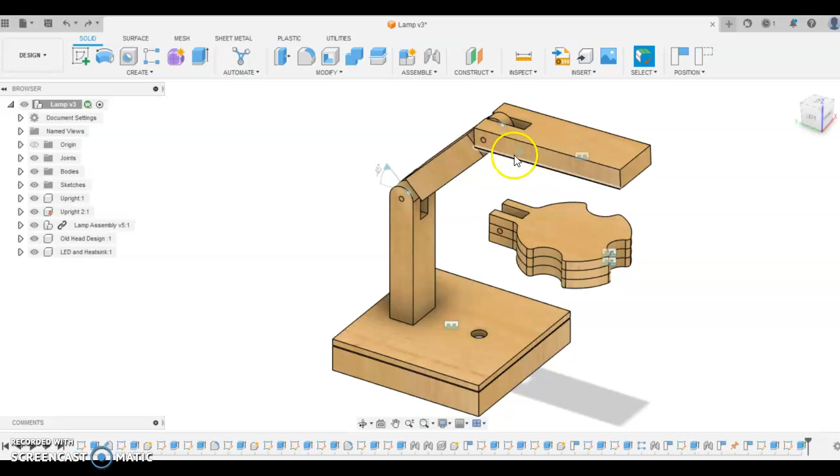Now, this is what we previously did in Year 9. We created a very basic head design.

Inside of that head needs to house the LED strip. The LED strip is quite thin, but it's actually mounted on a piece of aluminium. Your teacher will show you that in class. The aluminium is important because it takes the heat away from the electronic component.

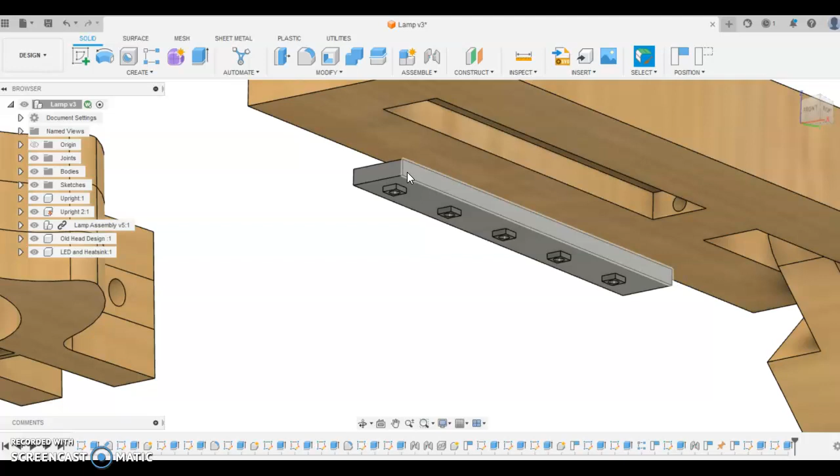Obviously, we don't want to stick it straight to the timber, because we don't want the timber to heat up and become a fire issue.

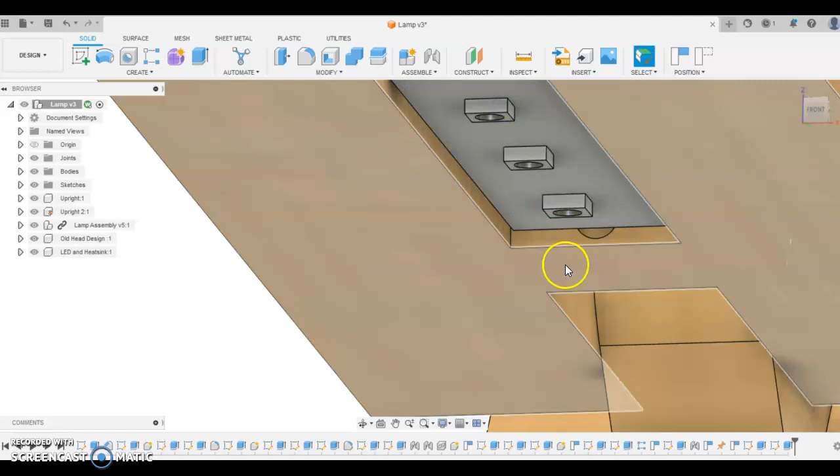The other thing we can notice about the existing head is that there's a hole to take the cord away. So once this is mounted up into the groove, which we used to manually cut, the cords would go into that hole and through, and then follow the lamp stand down and through a hole at the back. So we're still going to have to cater for that wire that goes down there.

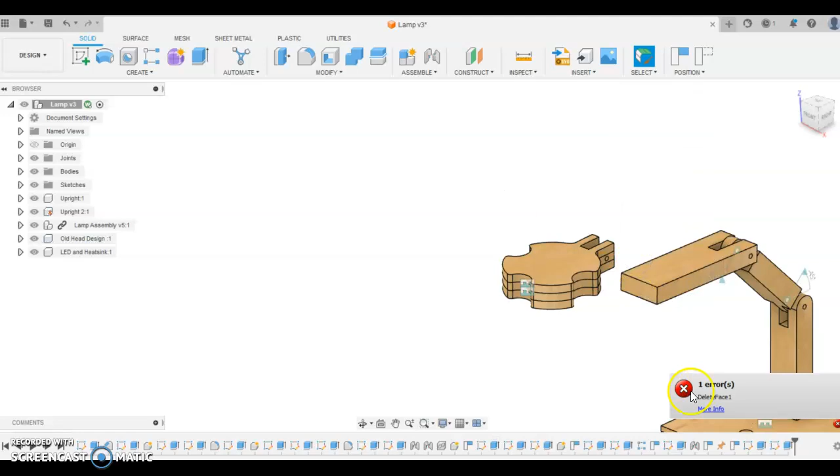So what we want to do is delete this manual component here. We won't do it that way because it doesn't work. We'll delete it here, and we want to create something more unique.

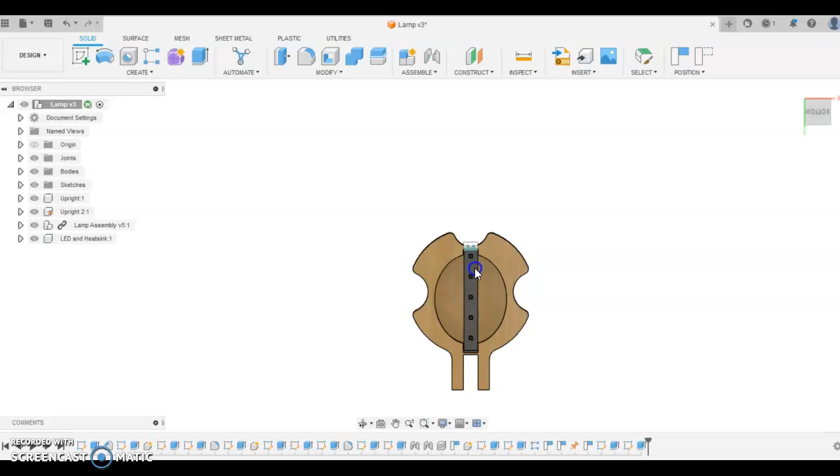Now, the good thing about the laser cutter is we can be creative without having to worry about getting our fingers near the cutting blades of the machinery. So curves are going to come out really nicely.

We can use a layering kind of technique here. We're limited to about 8 or 9 millimeters pine, so I've used 3 layers in this design.

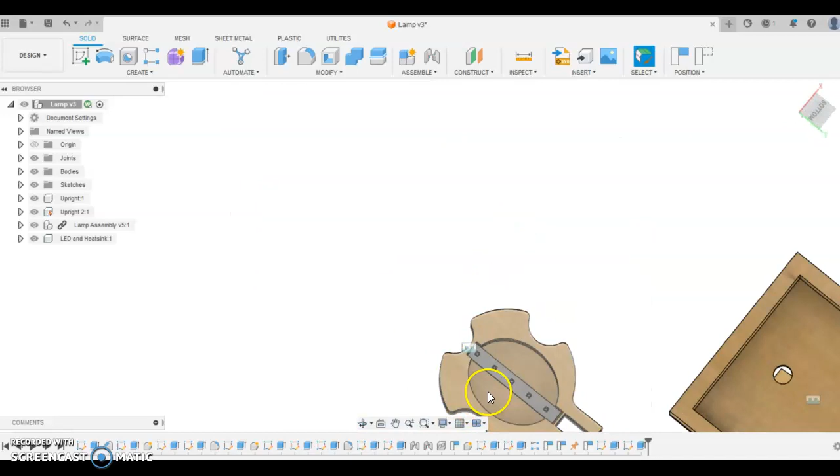You can see I just put in that LED strip, so I've created a housing for it to sit in that position. I've got a groove up the back here where the cord's going to come out, and we will have to manually drill these holes later on the drill press or a cordless drill in the workshop.

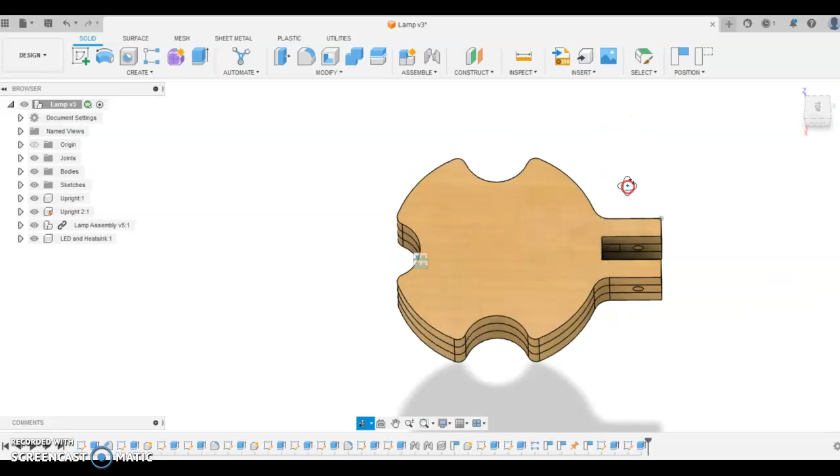We can't cut in a downwards action and then also through the flat or horizontal direction with the laser cutter. It's a top-down process, so it will only cut from the top down.

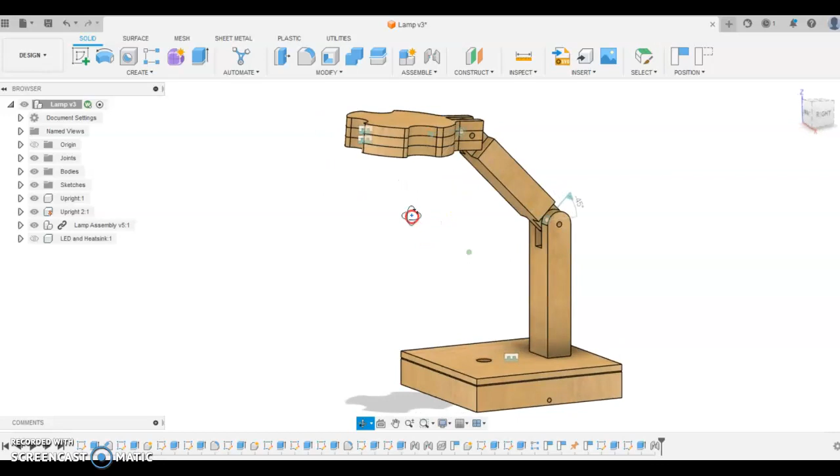So I've assembled the lamp head now onto the base. That's what it will look like. You can see the layers in the design, so I have to cut those 3 layers.

I'm going to go about now creating this, and I'll show you how I did it. Firstly, create a new design. Make sure you've saved that design.

So I've got it in a location, it's my laser cutting testing folder. I've titled it Lamp Head 3. I've only got a 3 there because it's my 3rd attempt at this.

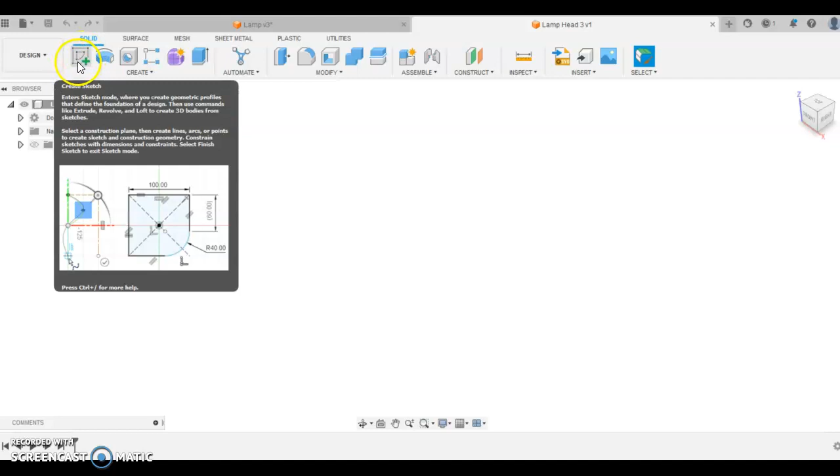And we're going to start drawing the lamp head. So I'm going to create a new sketch. I'm going to start on the top plane.

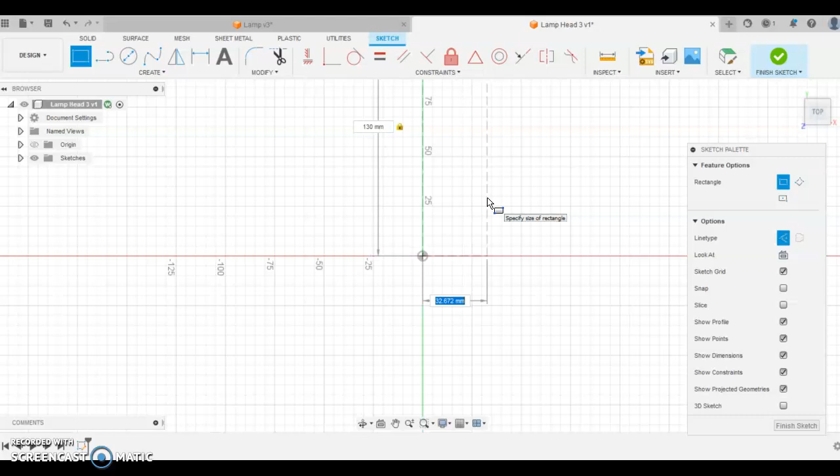And the first thing I want you to think about is it needs to fit within a certain size. So the material we're going to give you for the laser cutter is 130 millimeters high by 180 millimeters. So each profile that you create has to fit within that size, 130 by 180.

So I've deleted that sketch now, and we're going to start afresh. I'm going to create a new sketch. I'm going to select that same top profile.

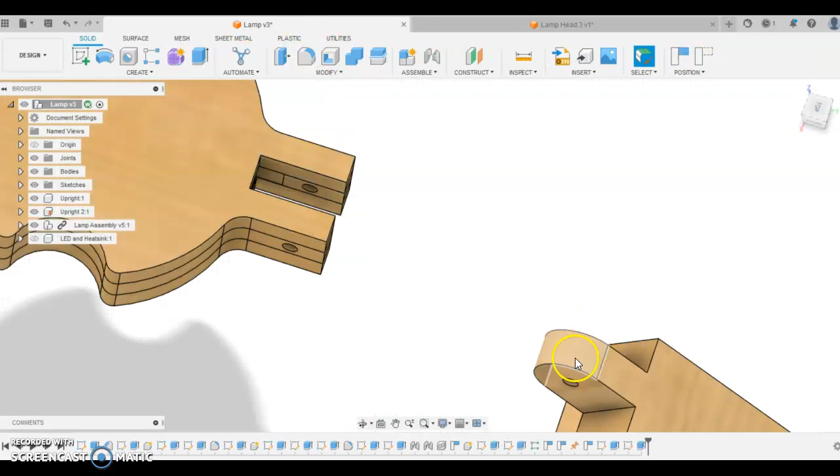And the first thing we're going to sketch is the thing that connects to the existing lamp. We've got 12 millimeters thickness here, and we're going to actually make this 11.7, because the laser cutter cuts right on the line and removes a bit of material when it cuts.

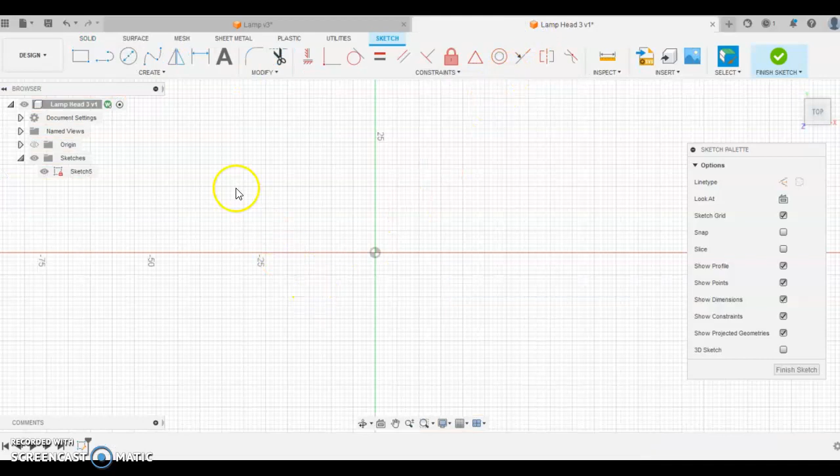11.7 is going to be the right size for this connecting part. To do this, we are going to use a center point rectangle. So down here, center point rectangle, we're going to put that 11.7 in here, and then tab, and I'm going to use 30 millimeters and enter.

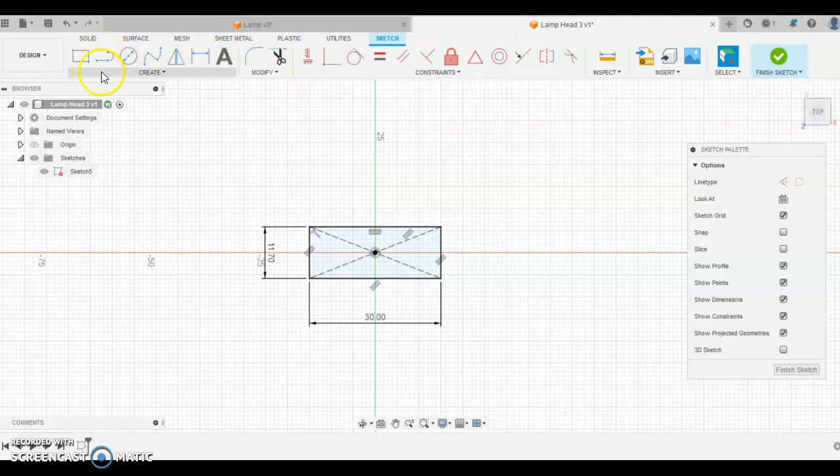Now from here, we're going to offset. So let's find, we can use center point rectangle again. So let's go back in here, and we're going to make a larger rectangle.

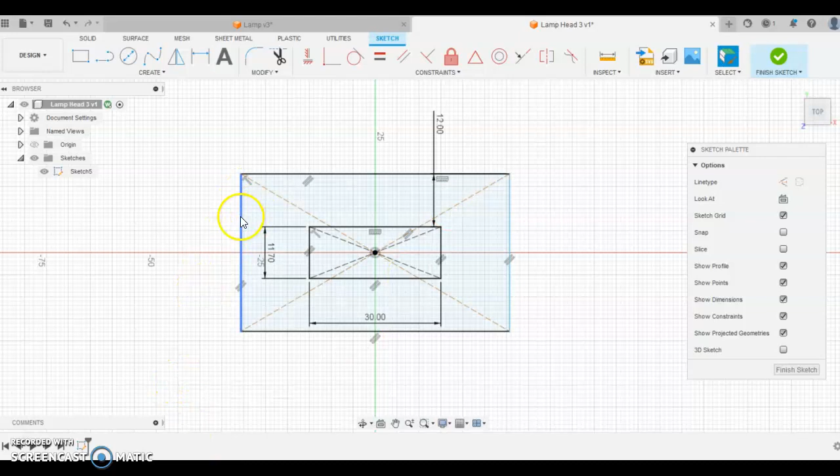So this time, I'm just going to click and I'm going to press D for dimension, and we're going to put 12 in there. Let's see what happens when we pull this way. So you can see that kind of brings both sides in.

I'm going to use a tool here which is called collinear, which is this one here. If I click that blue line and then this one, it will snap together. Now there's lots of lines going everywhere here, but essentially what I'm trying to get to is this center one's 11.7, the outside are both 12.

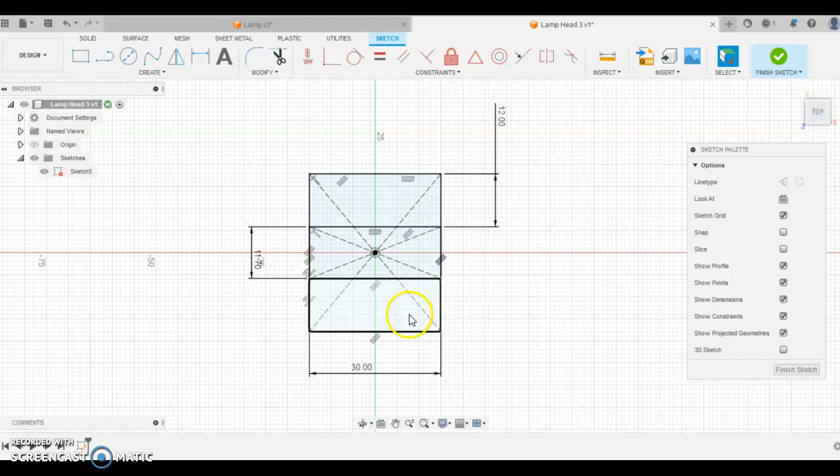Now if I go finish sketch and extrude, we only want these two pieces here. So we select the profile and bring that up to 8mm. Press enter. So now we've got that, we can create another profile.

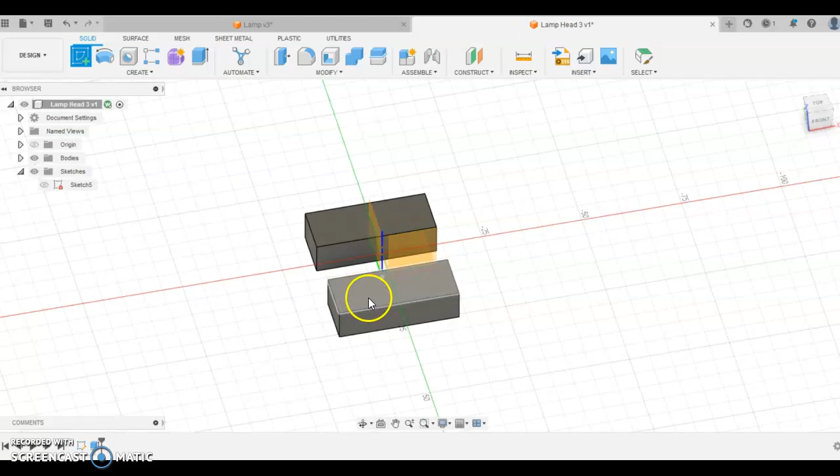So I'm going to go sketch here. I'm going to click the top component, either one's fine, and I can start drawing the lamp head.

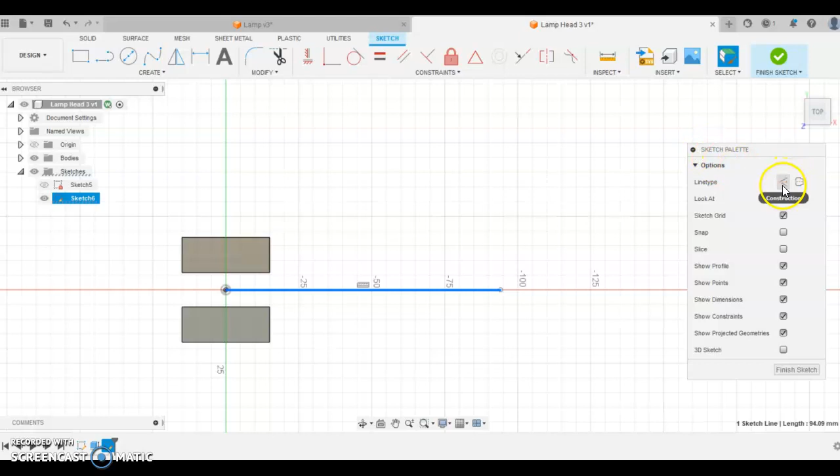So I'm going to use a construction line out in this direction here. I'm going to click that line and open up my sketch palette and click construction line. I'm just going to press escape now.

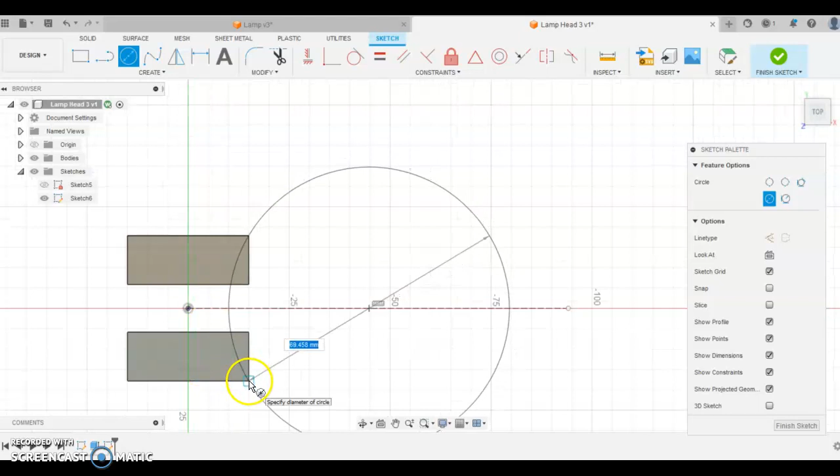And then I'm going to make my lamp head circular. So I'm going to create a circle like this and make sure it connects to one of these parts. It will be this one here. Now remember, the maximum size we're going to use for the lamp is 130.

So I'll put 130 in here.

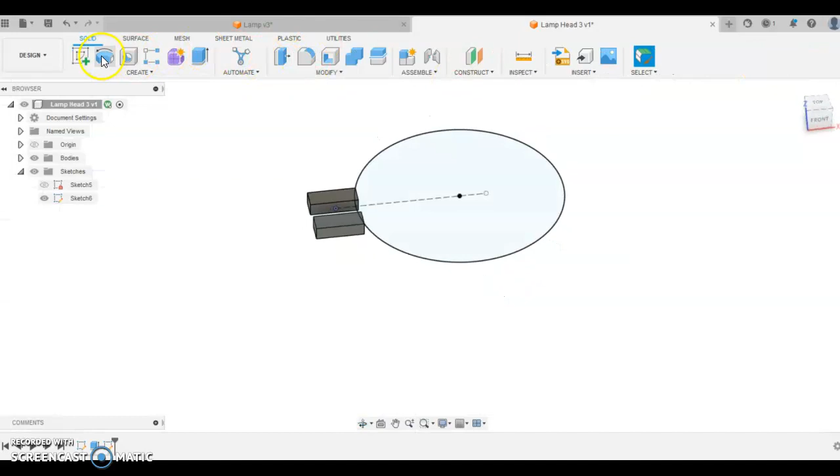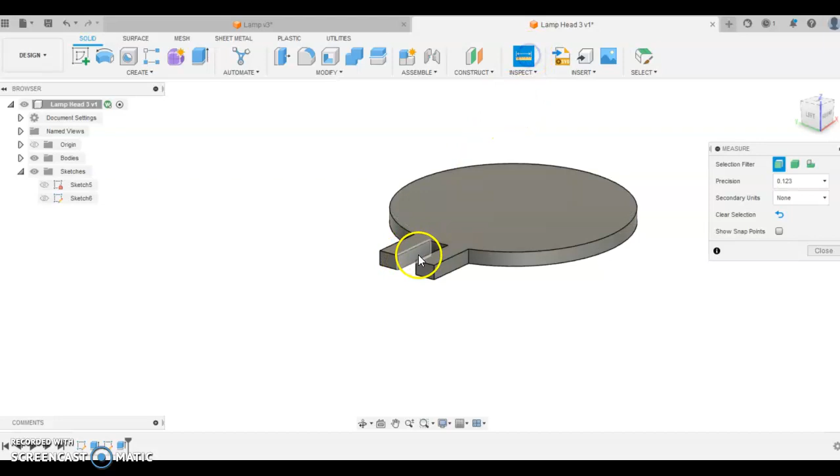And that looks good. Finish sketch, I'm going to press E for extrude. We'll select the button, and we're going to go downwards this time, -8. Make sure the operation here is join, not cut. Okay, so you can see now we're piecing this together with the 11.7 gap in between here and here.

You might want to add a detail at the front here, so I'm going to click here and create a new sketch. I'm going to use the circle tool here, and actually I'm going to do it on the side here. Like a little 35mm indent, which looks like a finger groove, I guess.

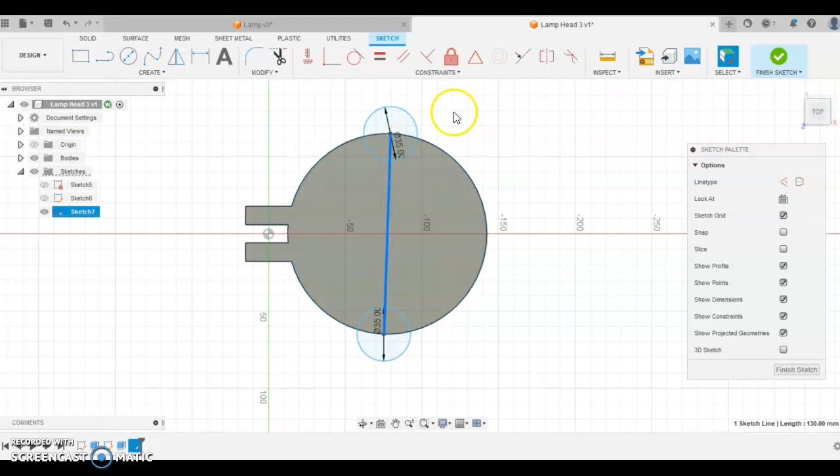Now at this point you can just be creative. There's no right or wrong with this, just what looks cool. This line here I've put connecting to the two centers, and if I use this one here, horizontal, vertical, it'll snap it kind of symmetrical on each side. And then I'm going to finish sketch, extrude away both of these sides.

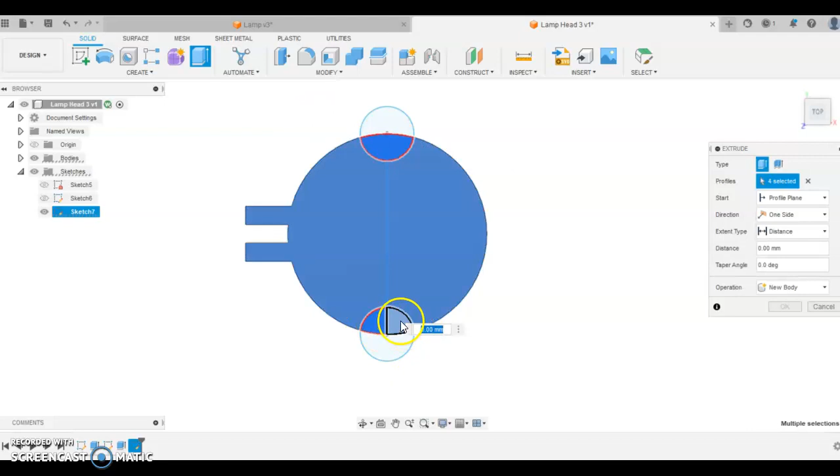I didn't want that center, so I'll try it one more time. Have to be careful about what you select, and then I'm going to cut that through. So that's basic enough for what I'm trying to demonstrate.

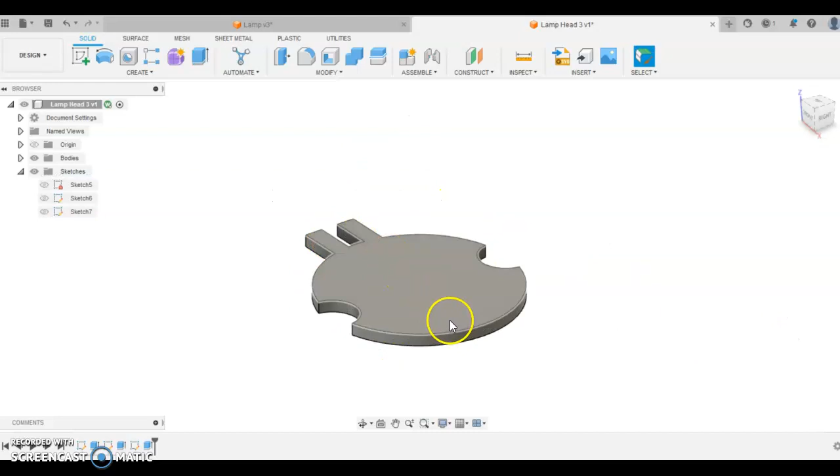So that's my first piece. What I'm going to do now is duplicate that. In this menu here, expand the bodies, and body 1, right click and go create component from bodies. So now this component here is listed as this component here.

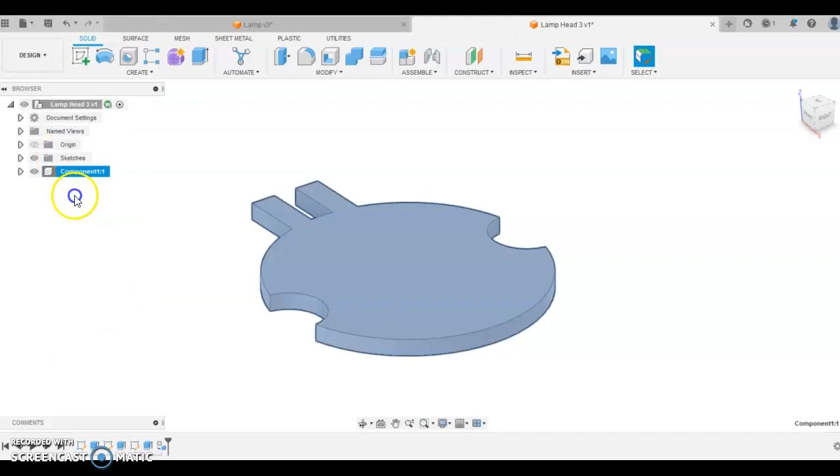I'm going to right click it and go copy, and then come up to the top, right click and go paste. But instead of paste, I'm going to go paste new. Now I'm going to pull this one downwards, and that's going to be my next layer. So if I click OK, I'll pull that one out of the way.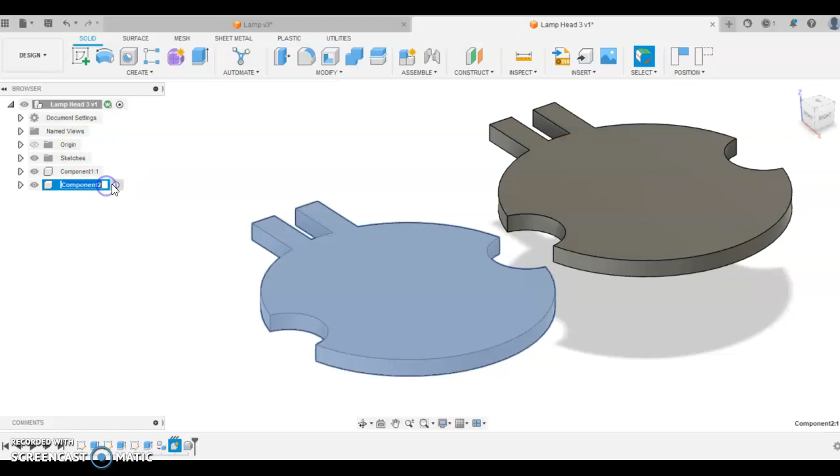I've got two exactly the same layers, and this one here is my component 2, or layer 2. I'm going to activate it, and then sketch on it. Capture position, and I can choose what I want to do to that. So I'm going to put a center line through first.

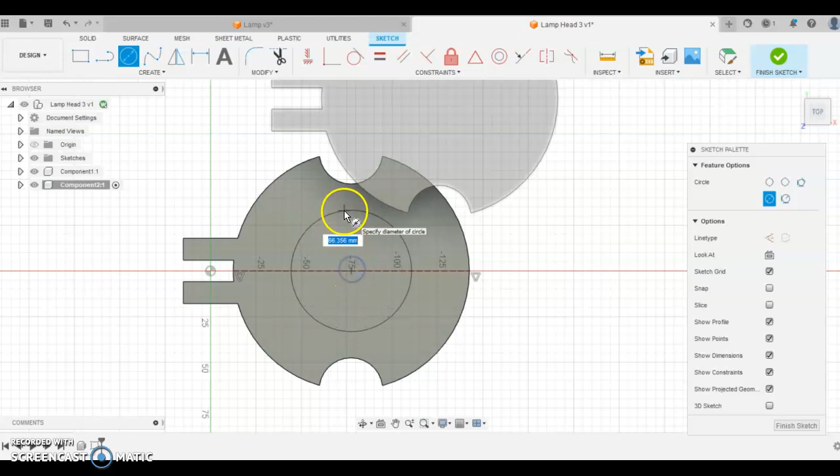I'm going to put a circle in the middle. I'll put a dimension on that. I'm going to use my center point rectangle again to remove a bit more material out of here, so 35.

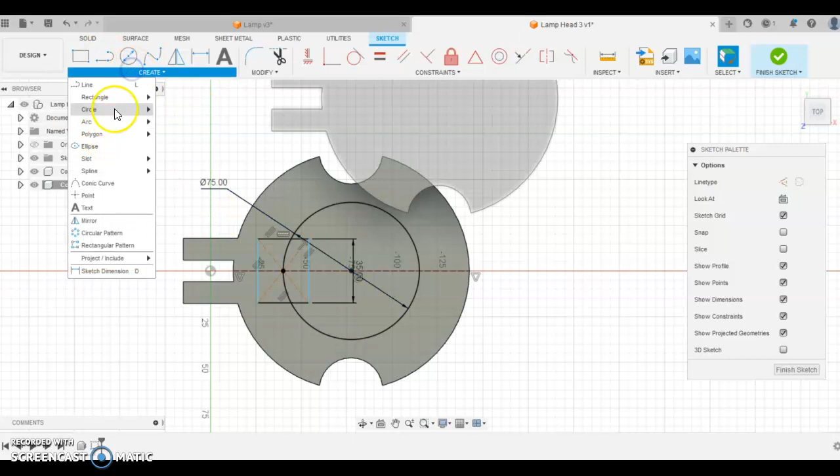Another one, center point rectangle, 35. And I might want to put a dimension from here to here, 100.

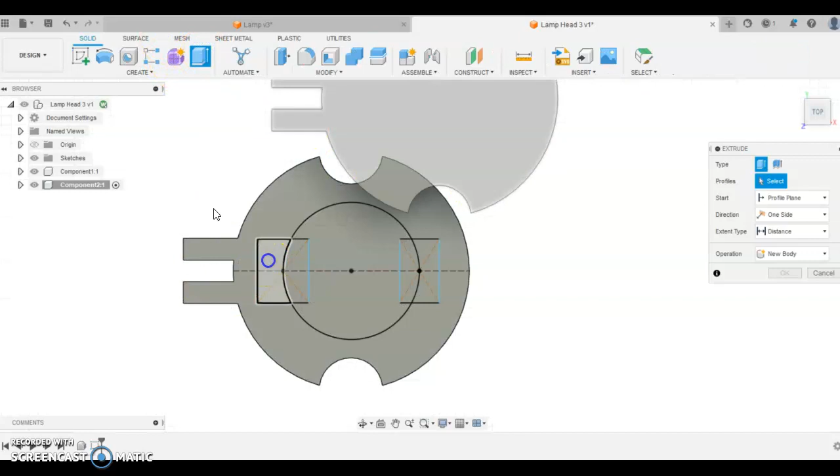So now if I finish the sketch and extrude all these components out, and extrude it the whole way through, we have got like an inside layer. I'm going to come up to the top here again and highlight this top dot, so you can see this layer will stack on top of the other layer.

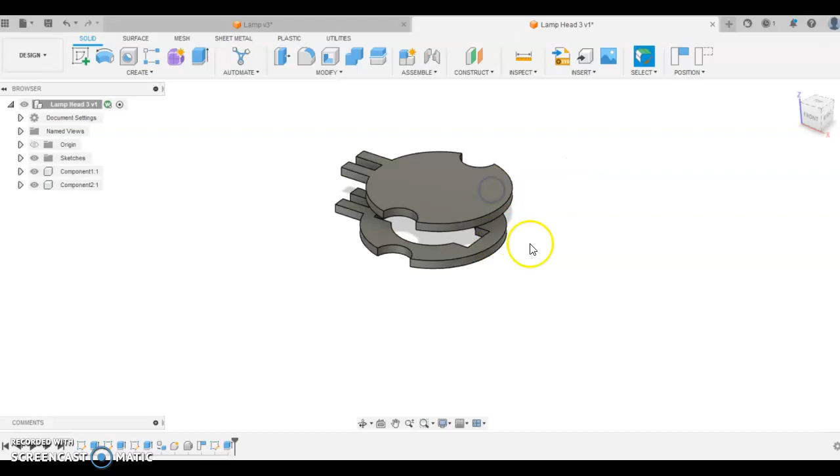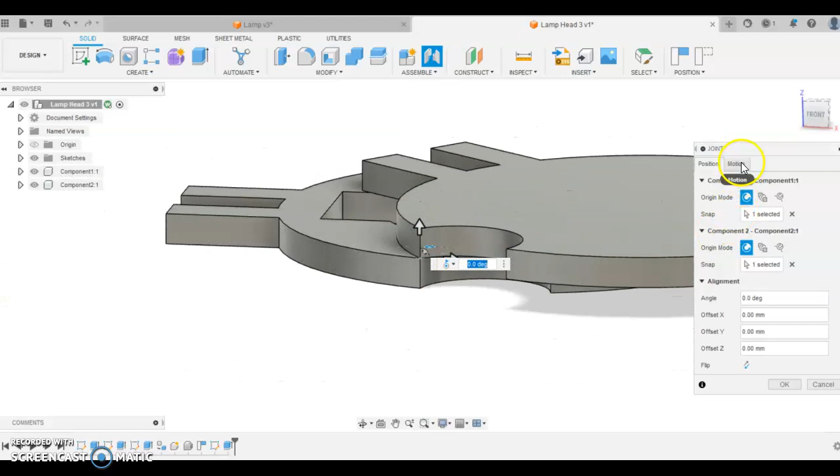If you want to do this the proper way, what we do is go into joint here, and I'll select a point that's the same on each, so this one here to this one here. I'll bring them together. This is in a rotation movement, but I'll lock it in as a rigid. So you can see my 2-layer design.

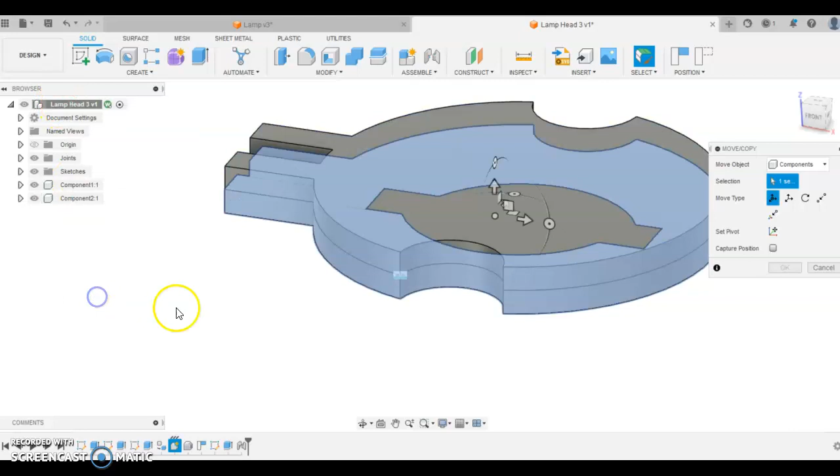The next thing I can do is come down to here, right click and go copy, and then back up to the top, right click, paste new. And I've got a third component, so layer 1, layer 2 and layer 3. I can do that joining technique again. And I've got a head design for my lamp.

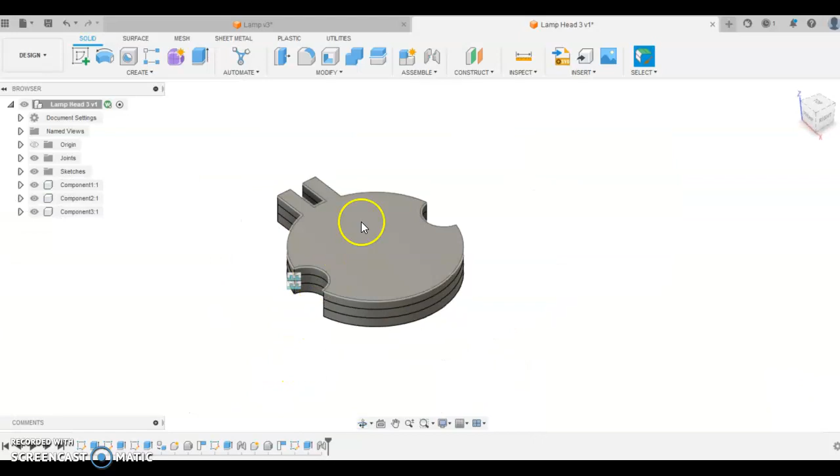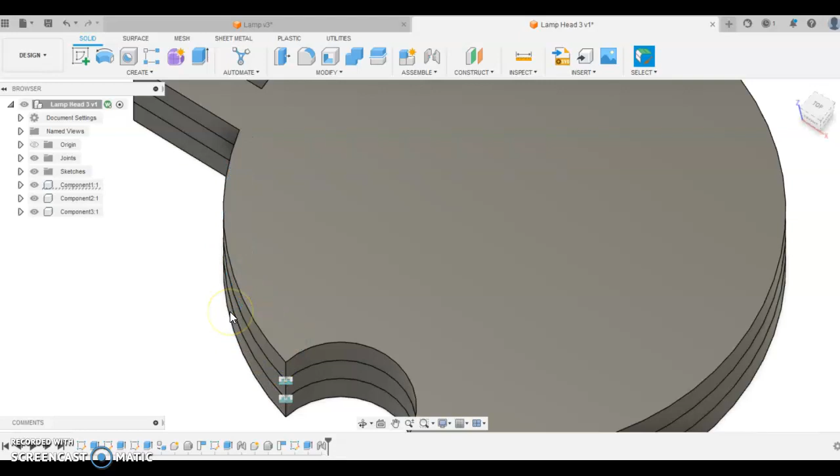So you can be a bit more creative than this. The key for creating these though is a top-down process, so you need to make sure it's only a profile. We don't want to start creating things with fillets on it, so like this here, if I put a round over edge there, the machine's going to get confused and it's going to want to cut right through with this line and right through with this line. So it's going to be quite sharp and bulky kind of edges.

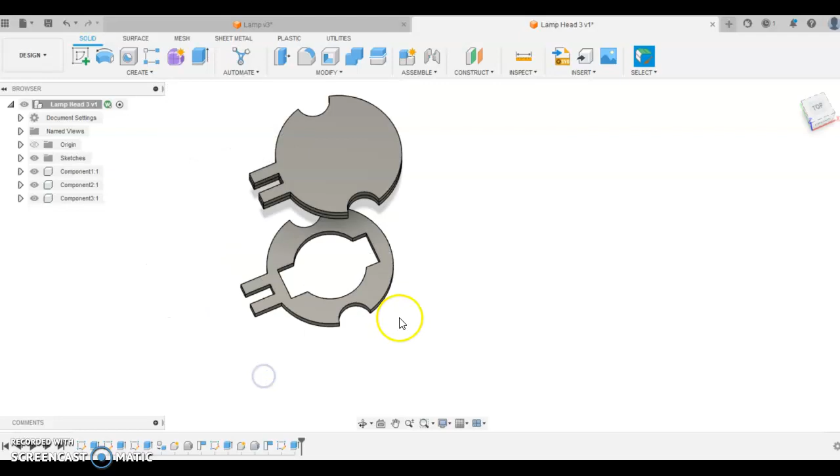We don't need to put the hole through here yet. We don't need to put the hole through here yet. Just think about layers that will be able to be cut with a laser cutter, and I'm sure your teacher will go through it a bit more in class about what's appropriate design.

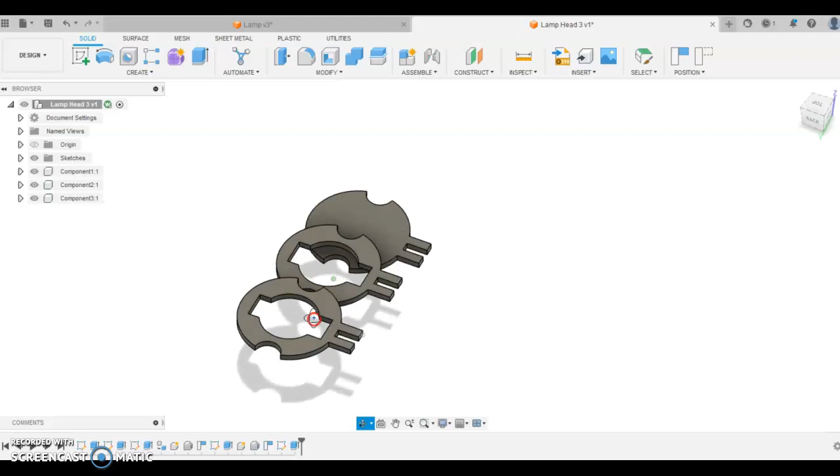The next video I'm going to show you is how to prepare your laser cutting. So you can see here I've got my 3 separate layers that I'm going to laser cut. Then we'll take them into the workshop and continue to do the sanding to round things off, and gluing to assemble together, and drilling to assemble it to the rest of your lamp.